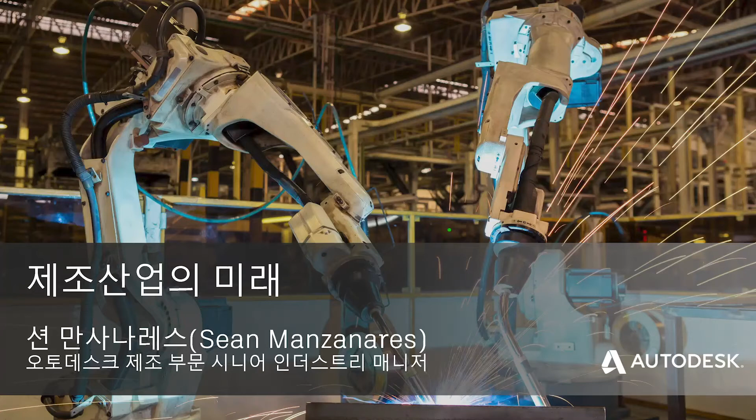I'm a senior manager of the Business Strategy and Marketing Group, working on market development for North America and Asia Pacific. Autodesk makes software for people who make things. If you've ever driven a high-performance car, admired a towering skyscraper, used a smartphone, or watched a great film, chances are you've experienced what millions of Autodesk customers are doing with our software.

In June of this year, President Moon Jae-in declared a manufacturing renaissance vision to turn the country into one of the world's top 4 manufacturing powerhouses by 2030. This will accelerate manufacturing innovations with a focus on making things smart, such as smart factories, and increasing the adoption of advanced technologies, including artificial intelligence based in manufacturing, also eco-friendliness, and a convergence. This vision prioritizes nurturing talent and technology adoption.

Korea is aligned with Autodesk, and this is what we call the future of making.

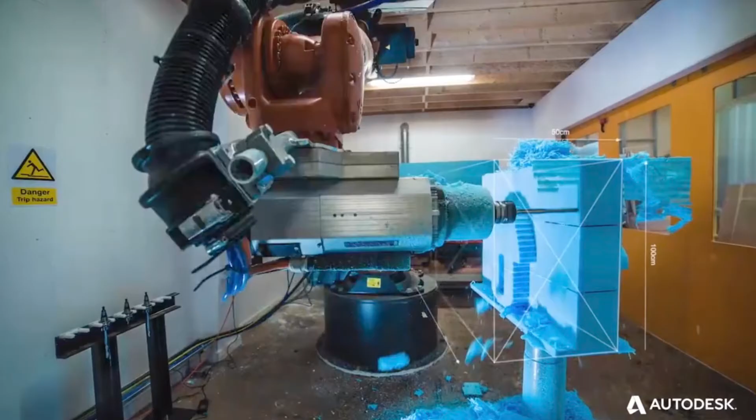For those that don't, let's watch a quick video that showcases where we are at with Autodesk and our products.

Every time I watch that video, I smile and I capture something new. And this video really showcases who Autodesk is. When you look at us in terms of media and entertainment, commercials, gaming, movies. If you look at our architectural engineering construction business, you can see the tallest skyscrapers and the software that we use to design that. I'm here representing our design and manufacturing group today.

A lot of our technology is on display in that show reel as well.

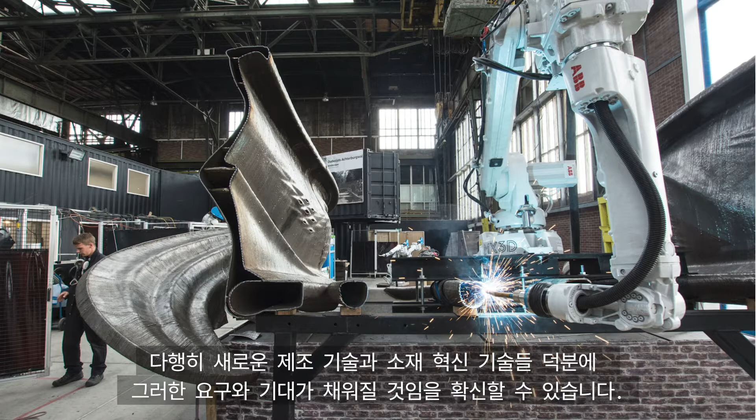One thing is for certain, our customers are in control and manufacturers have a problem. Our customers expect, actually they demand, more innovative and better products. The good news is that new manufacturing technologies and material innovations offer tremendous promise to do just this. But there is a problem. Even if manufacturers are able to spend more on manufacturing, the skilled workers needed to run these new machines are missing. 40% of manufacturers say that with an aging workforce, skilled workers are virtually impossible to find.

So companies are asked to do more with less. The problem is that recent trends in manufacturing aren't looking good. Over the past 10 years, overall productivity of global manufacturers has increased just 3%. That's a 0.3% increase per year in productivity. This is a major problem for manufacturers. 61% of CEOs polled say that their biggest barrier to delivering more innovative products to their customers is engineering productivity.

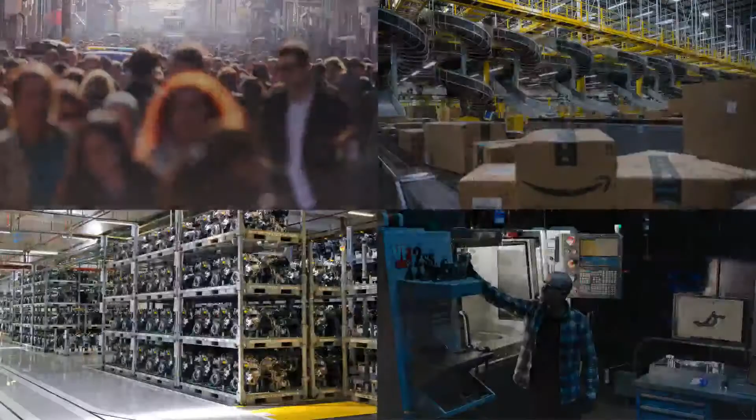So we cannot continue as we do today. We need to do more with less negative impact on the planet. Addressing the inevitability of having to do more, along with the reality of doing it with less negative impact, is a massive challenge. But addressing this fundamental capacity issue is also the biggest design and manufacturing opportunity we have ever had. It is up to us to turn a challenge into an opportunity of better.

Despite the trends, CEOs generally see this as an opportunity for their companies. 95% of CEOs see technology changes as an opportunity for them to thrive. Just want to repeat that. 95% of CEOs see technology changes as an opportunity for them to thrive.

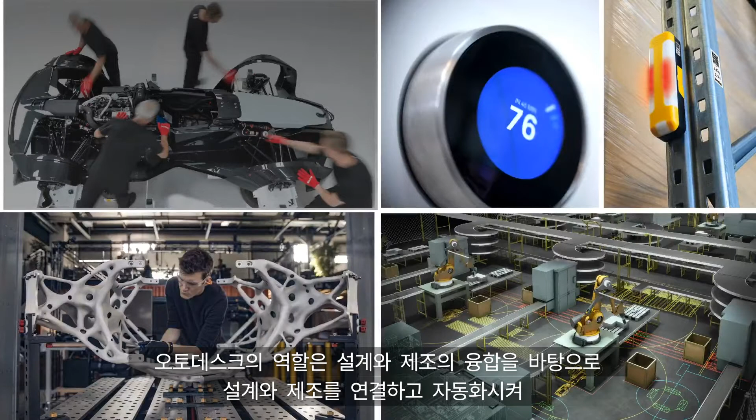Our answer is to help companies innovate and increase productivity by connecting and automating design and manufacturing with the convergence of design and manufacturing.

Recently, I was reading an article from Forbes where Bernard Marr wrote about the 9 mega technology trends and how they are reshaping our world today.

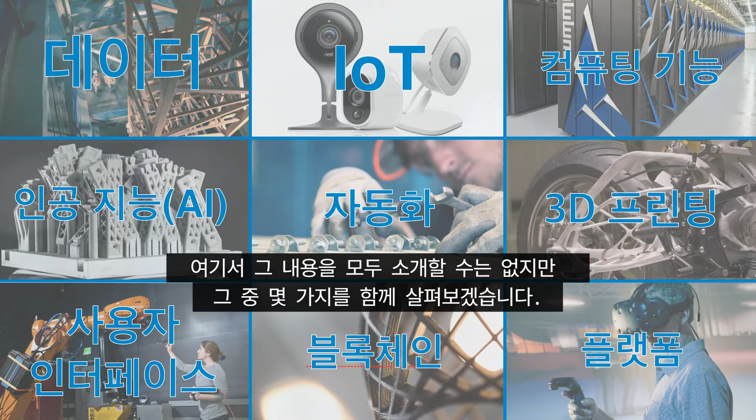Now, I'm not going to hit on all of these, but there are a few of them that if a company were to embrace, can help them with their competitive advantage. Because all of these together are disruptions, and they're disruptions for your company, they're disruptions to your return on investment, they're disruptions to your bottom line.

So out of these 9, let's start with computing power. What you see is a supercomputer at Oak Ridge National Laboratories called the Titan. This is a government facility in the United States, and not everybody has access to something like this.

Supercomputing is just that, it's super. But how do you, as a small or medium or an enterprise company, accept and be able to become competitive for people that do have supercomputing power?

High performance computing enables you to increase the speed of research and reduce time to results by running high performance computing in the cloud and scaling to a large number of parallel tests than would be practical in most on-premise environments. What this is saying is that something similar like Amazon's cloud is bringing HPC for the 99% of the people.

So if you do not have the capability, the capacity, or access to a supercomputer like the Titan at Oak Ridge National Laboratories, you are able to leverage the same supercomputing power in the cloud. And that's a key word that we're going to talk about, is the cloud.

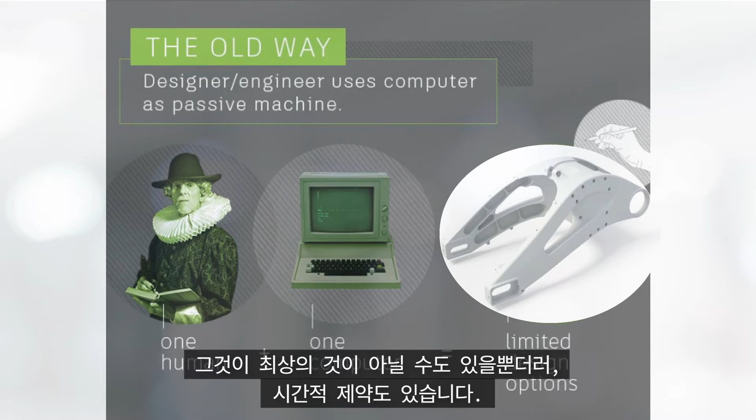For example, the old way of doing design is when you have a human and you have a computer, and you input your team's ideas into the computer for product X. However, you're only getting limited design options. And those design options may not be the best design option, but you are bound by time. You are bound by different impacts to coming up with the best design.

So your concepts may be limited, but they're based on, is it the material or the manufacturability? Do you have enough time to do validation? Bottom line, it literally is your time to market. How are you able to go from concepts to production faster than your competitors?

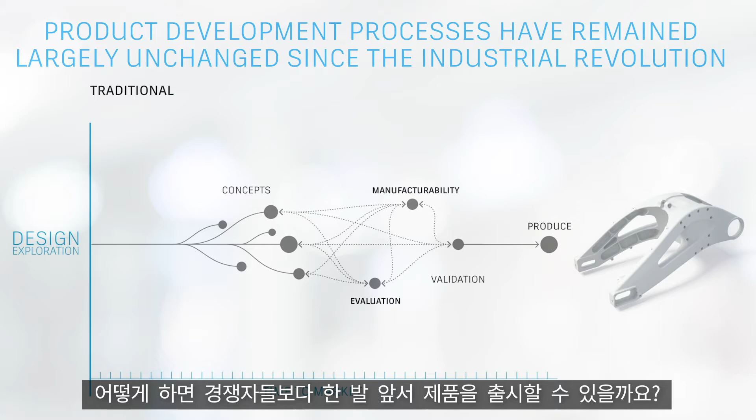Let's talk about the new way of doing design. The one human or the human team is still consistent. But now you are incorporating machine learning algorithms or artificial intelligence with unlimited cloud computing power, which are going to allow you to yield hundreds, if not thousands, of different design options.

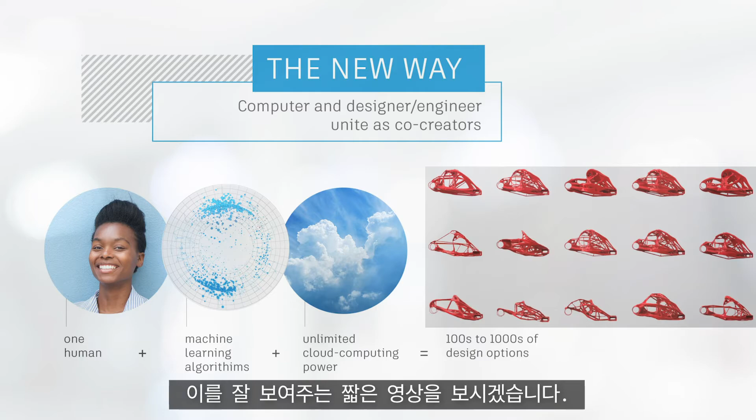Let's watch a quick video that describes this for us.

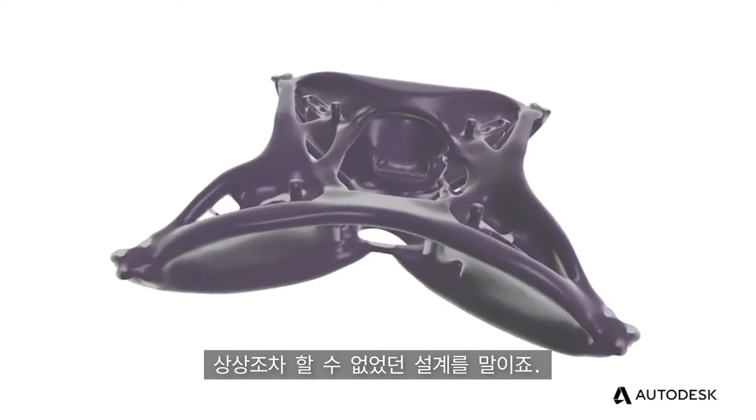What if you could come up with thousands of options for a single design without drawing, all of which meet specific goals set by the designer? And from those options, pick the one design that delivers on the most important criteria, the design you couldn't possibly have imagined. This is generative design, a technology that harnesses massive computing power, creating forms with precise amounts of material only where needed, achieving maximum performance while wasting nothing.

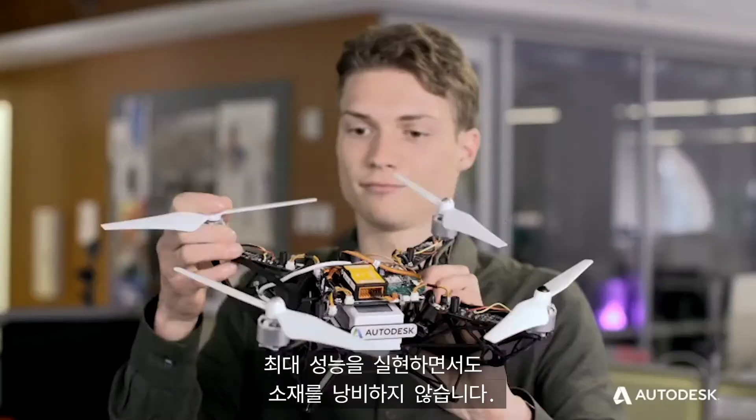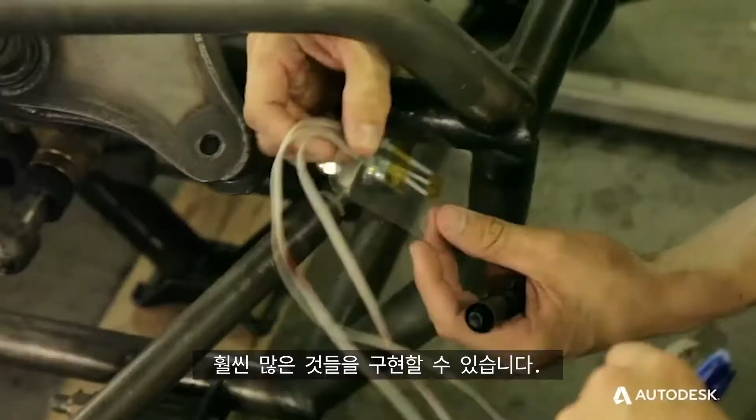But generative design can be about much more than simply turning out alternatives. Prototypes can be scanned and equipped with sensors that provide real-time performance data that can be looped back into the design process, so the object, in effect, co-designs itself. And depending on the material and method of manufacture chosen, the software can optimize the design for those choices.

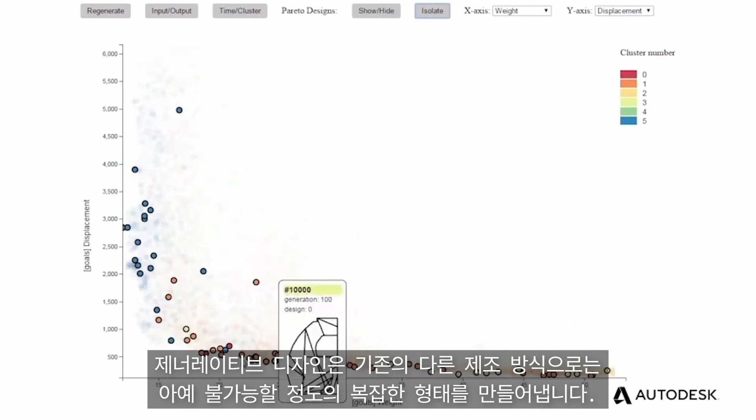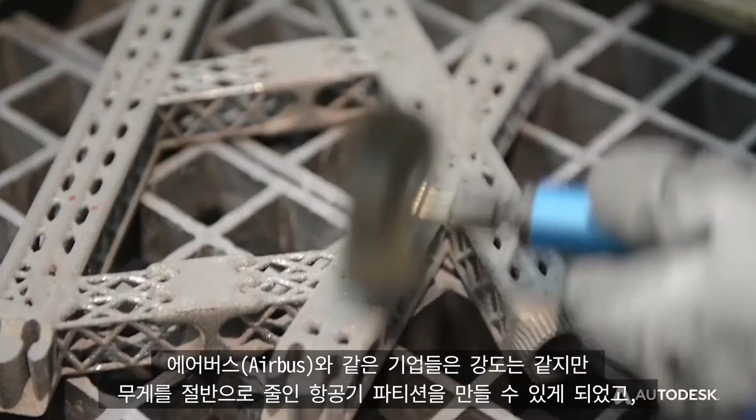In its search for the optimal design, generative design creates complex forms that would otherwise be impossible to make using traditional manufacturing methods. Now, with advancements in material science and the ability of 3D printers to print metal, companies like Airbus can create forms like this airplane partition panel that's half as heavy and just as strong. The result? Significant reduction in fuel costs and CO2 emissions.

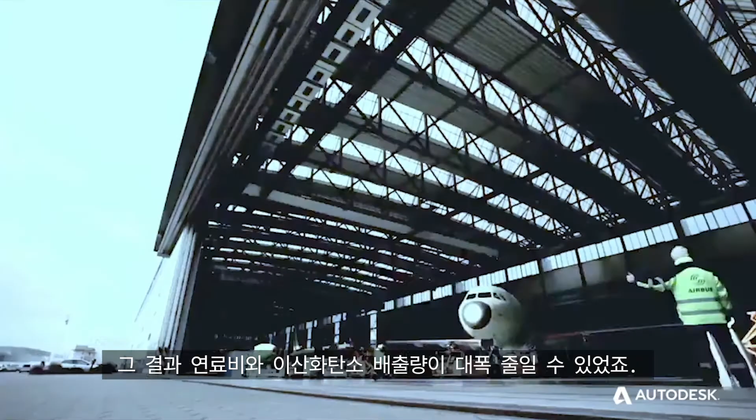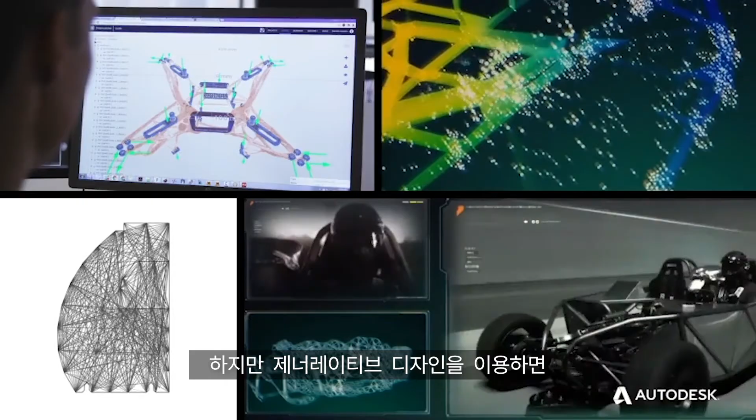The things that have limited us in the past, software, materials, manufacturing, no longer do so. With generative design, the world can look and perform any way we want it to. This is the next stage in the evolution of design, and it's happening now.

I thought a big takeaway from the video was the quote: achieving maximum performance while wasting nothing. This begs the question, are you taking advantage of these tools that are commercially available today? An additional question also has to be asked: what is your competition doing in this space?

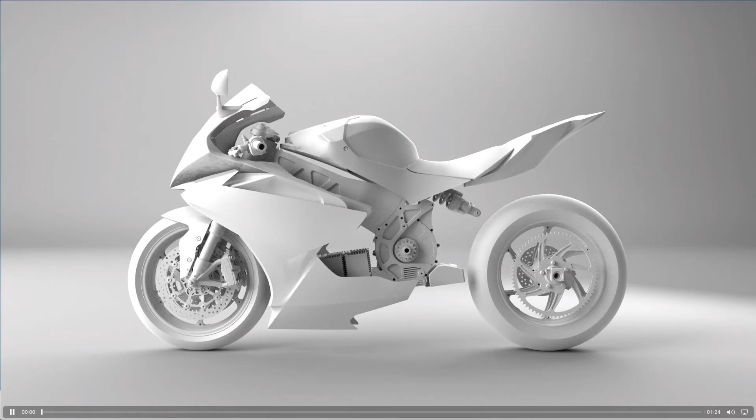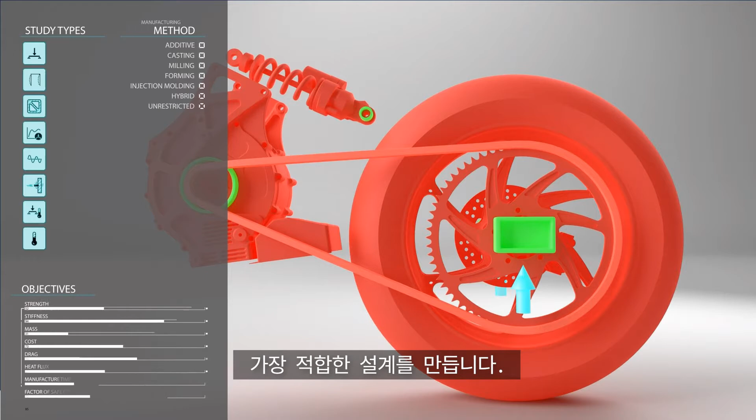Utilizing the motorcycle again, you select 2-3 different areas, areas that you need to preserve, obstacles you need to avoid, as well as the types and amount of loads that you want to put on your design. Now you're leveraging supercomputing power in the cloud, as well as artificial intelligence to help you make the best designs possible, allow you to select the best designs possible.

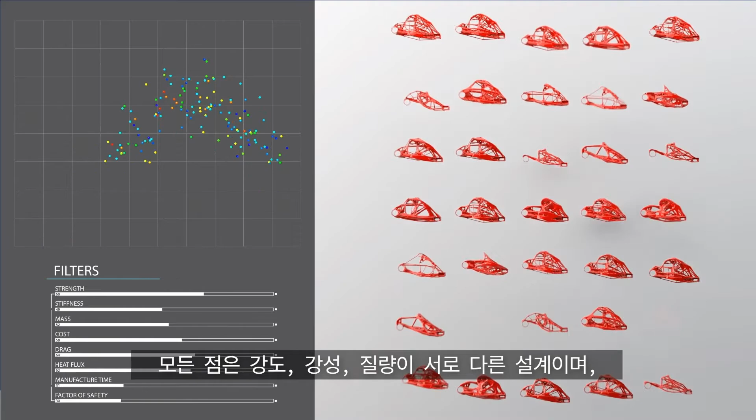Every dot is a different design based on strength, stiffness, or the mass. And now you can start playing what-if examples by putting the different designs in there that'll help you understand and make the best decisions possible that you would never have been able to do in the past.

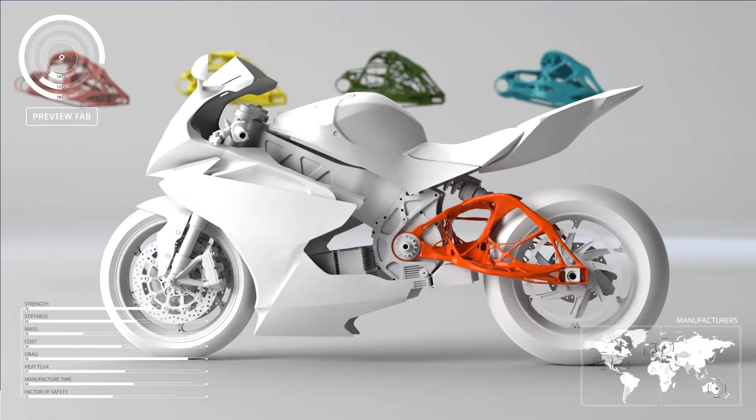Ultimately helping you select and differentiate yourself. And then it goes into how you want the part to be manufactured. Obviously, you're going to still be using some subtractive manufacturing methods. Being able to do this all within the same window is critically important.

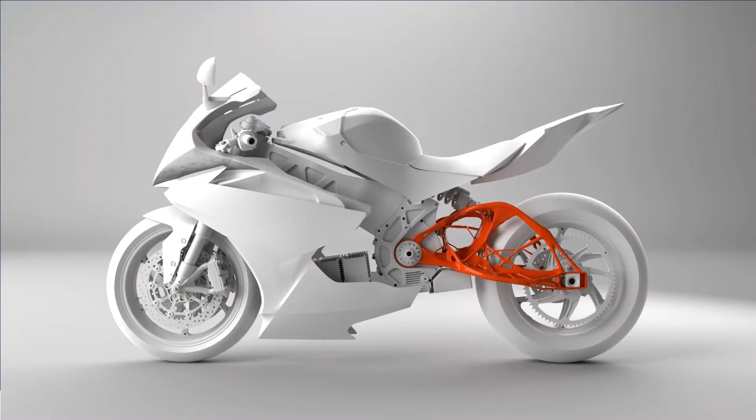Let's take a look at another trend, which is 3D printing, historically known as rapid prototyping and now known as additive manufacturing.

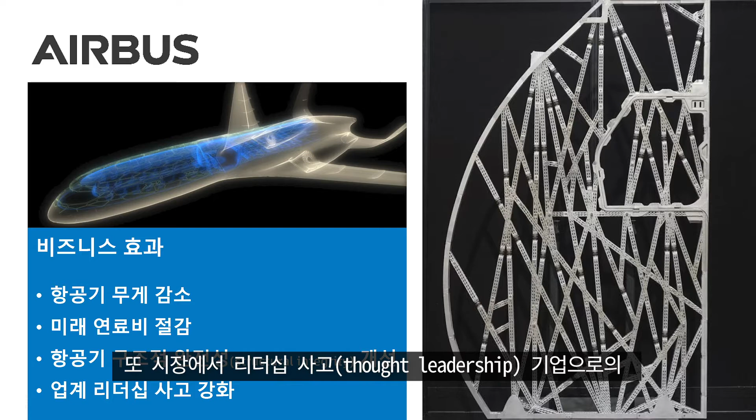You saw in the video about what is generative design, some examples from Airbus. This is the Airbus partition, but it was not just about coming up with a new design that looked organic or structurally superior. Airbus has to make business decisions. They wanted to reduce the weight of the aircraft at delivery. They wanted to save on future fuel costs. They also needed to signal the market that their thought leader position is number one.

So we take a look at the partition. This is what it looked like after 3D printing or additive manufacturing. This is the nested product. What's also interesting to note is that they invented a new alloy called Scalmalloy.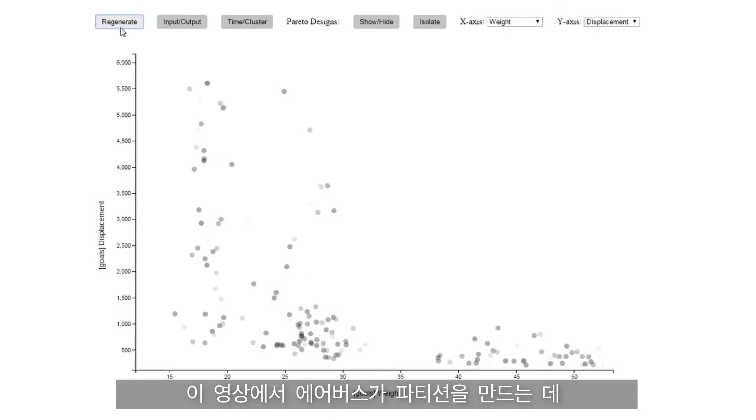Let's take a look at the video of how Airbus utilized generative design for their partition.

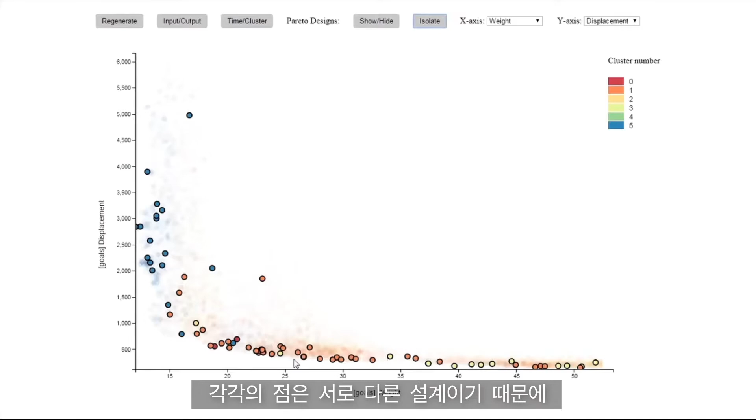Every dot is a different design based on stress, based on force, and these always change based on the needs of the design, not on the needs of what a designer wanted to do. They started to get a better look of these thousands and thousands of different designs to help them make the best decision. Once again, every dot is a different design, which helped them make the best decision for their product. Now, did they want to make it stiffer, heavier, lighter, stronger? All of these different choices help them come up with the best design.

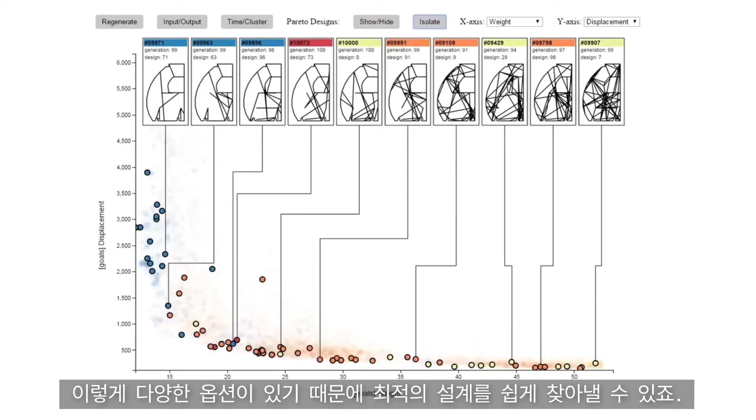Let's look at another company. General Motors plans to launch 20 new all-electric vehicles by 2023. General Motors believes in an all-electric future. So what are they going to do to help them? They looked at one of their products, which is the seatbelt harness. They also had business impacts they needed to make. They needed to save on material costs. And they needed to simplify their supply chain and increase performance.

Let's take a look at what General Motors is doing.

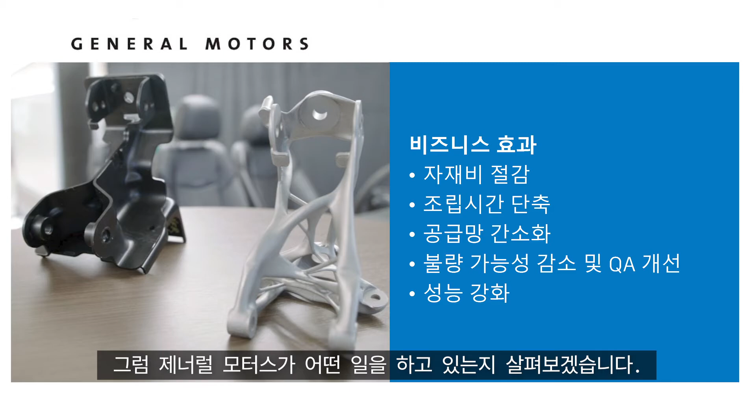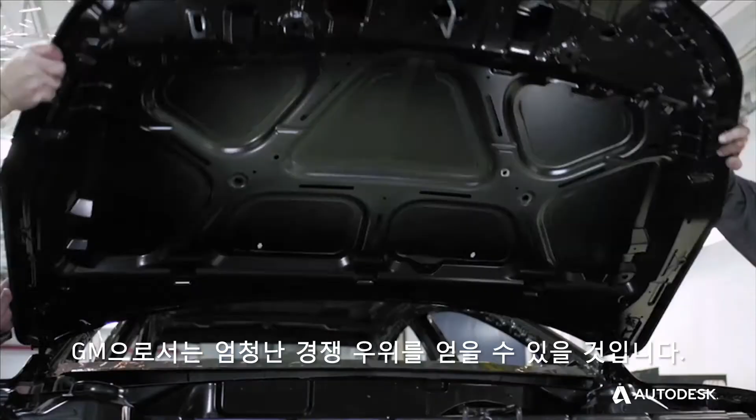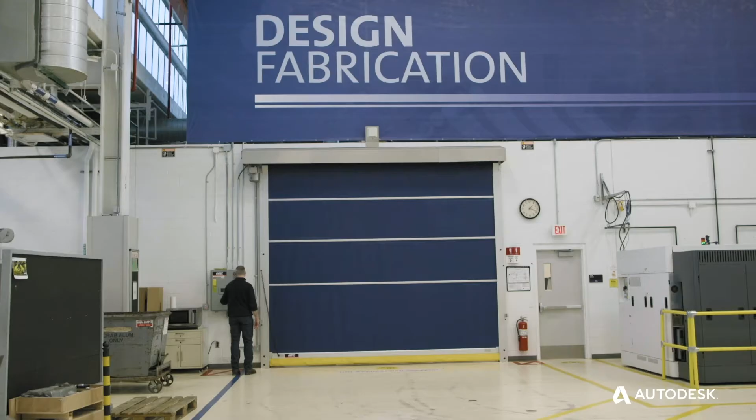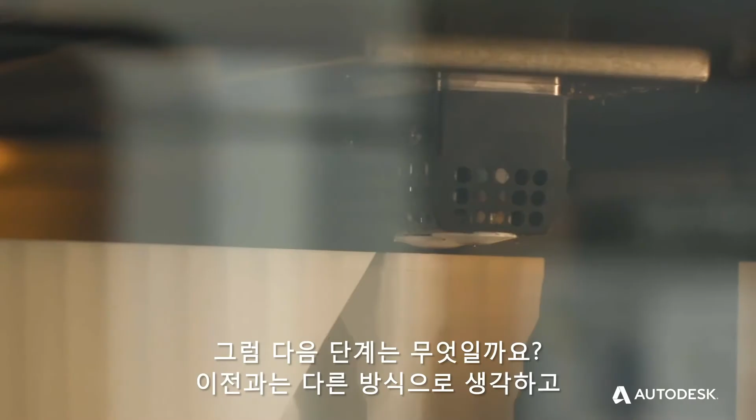At General Motors, we're all about putting our customers first and at the center of everything we do. If we can add a mile per gallon of fuel economy, if we can extend our range 10 miles in an electric vehicle, that can be a huge competitive advantage for General Motors. As you start looking into the future, generative design paired with additive manufacturing can be completely disruptive to our industry to deliver those functionally optimized designs and deliver performance to our customers that they couldn't get any other way. We've been doing additive manufacturing at GM for over 30 years. Rapid prototyping, assembly, tooling, jigs, fixtures. How do we take that next step? Getting people to think differently, not migrate back to, well, we can't do it.

Additive manufacturing can enable us to do this. We have some very unique design challenges in some of our upcoming vehicle programs.

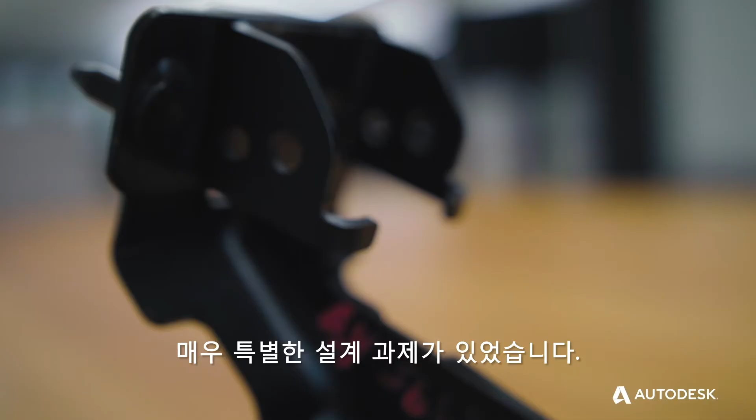One of those was the seat bracket. That seat bracket is very important from a functional safety perspective. How can we fully functionally optimize that design for mass?

We chose to use generative design as our design tool to come up with different options for the seat bracket. Normally when we face a design challenge like that, we may come up with 2 or 3 different design options, but with generative design, we could come up with over 150 solutions that we just couldn't have thought of with any other existing design tools.

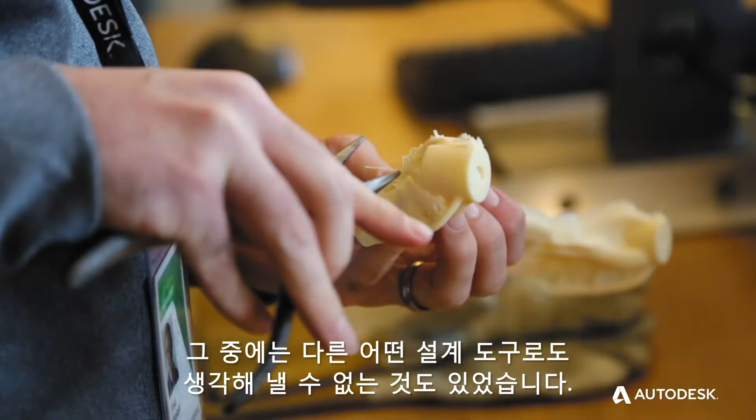We formed a partnership with Autodesk. We thought it was a unique opportunity to really use those tools to deliver a design that we couldn't come up with any other way.

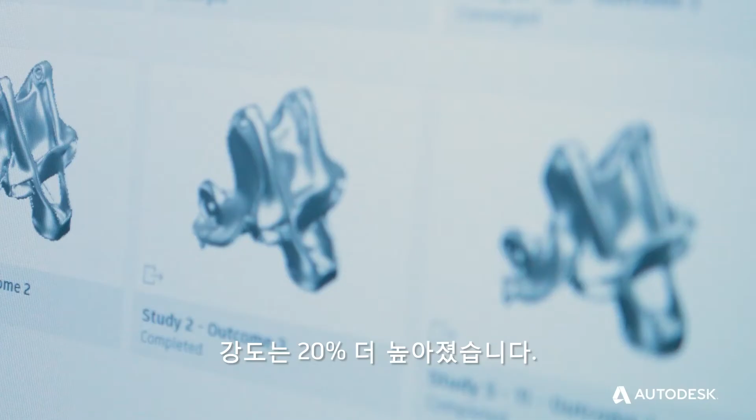We've run it through our normal set of test procedures that are required for this part. This part is so much better than the previous part. 40% mass savings, at the same time getting 20% stronger, far exceeded my expectations of what we could achieve.

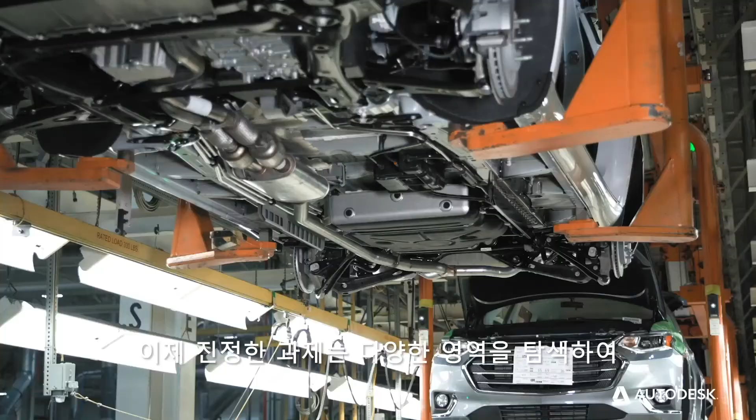We have many different parts and pieces on our vehicles, over 30,000 on average. So now the real challenge is to find all those different applications where we can apply the same principles of generative design to really optimize our vehicles further.

Let's look at our last example of the mega technology trends about interacting with technology.

We're going to move to Germany, where Claudius Peters was founded in 1906. Claudius Peters is serving the heavy-duty industries, and they are a leading manufacturer of material handling and processing systems that can be found in cement, gypsum, steel, and aluminum plants across the globe.

So as we were looking at Airbus and a partition and General Motors with a seat bracket, let's look at how generative design is helping industrial manufacturing.

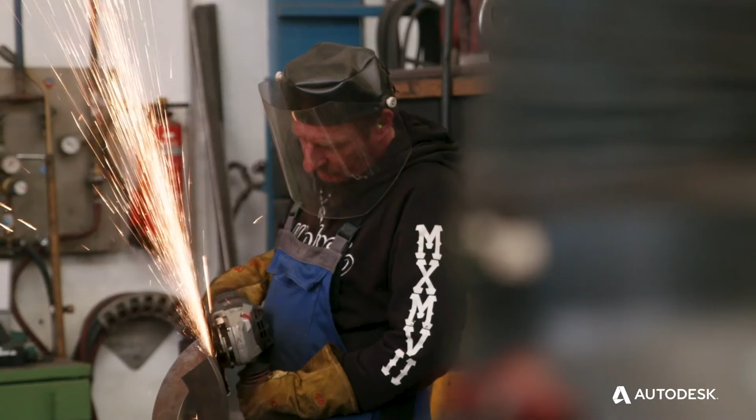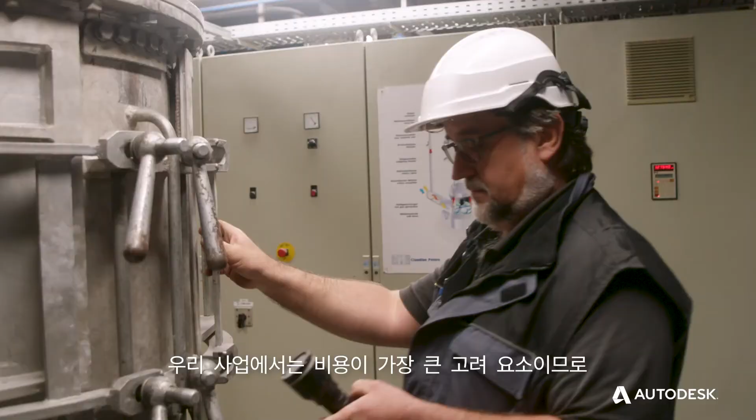Claudius Peters provides machines and process plants for 112 years. Our business is very cost-driven, so the customer is expecting us to deliver faster, to deliver cheaper. We have to change how we do things, how we engineer, how we make projects and products.

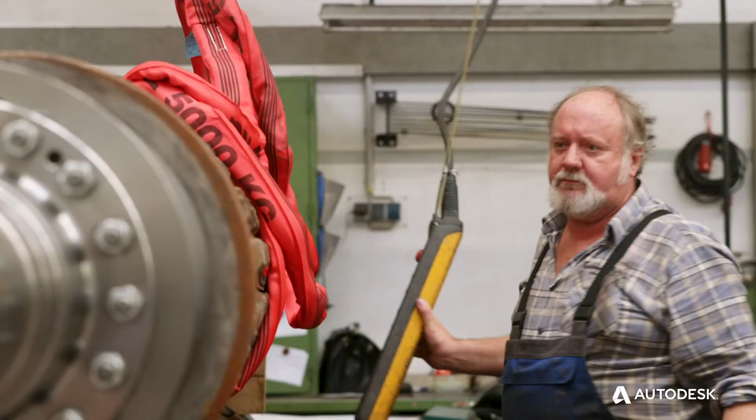Claudius Peters loves to experiment with new technologies and new ideas, so I came up here one day and gave them half a day of training on generative design.

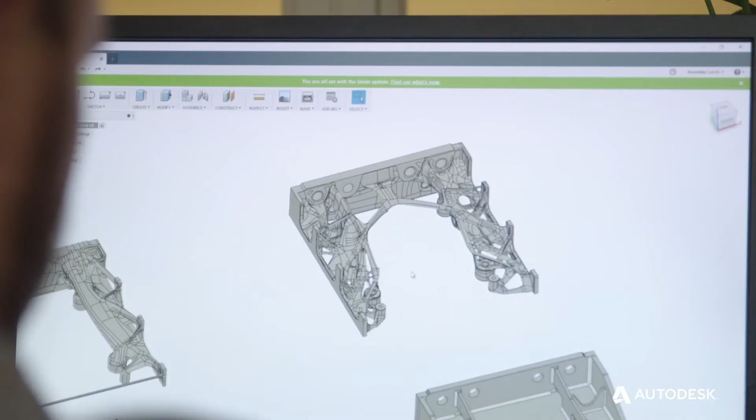At first I thought that the workshop was just for fun. We were designing and using some easy parts, but we ended up recreating a real part from Claudius Peters. We were completely surprised about the shape and what generative design made out of our already optimized part.

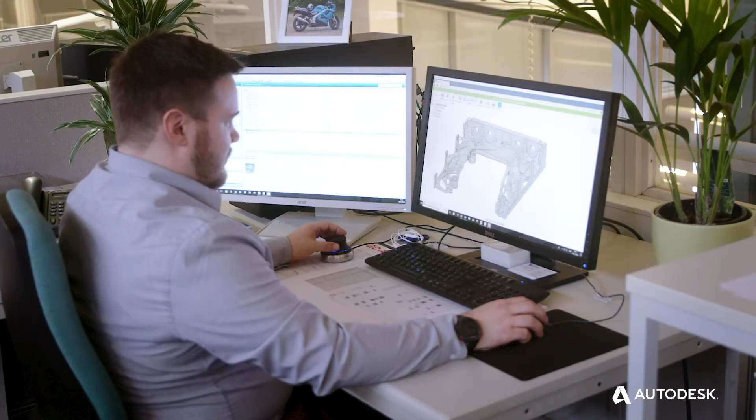The oldest engineer in the house actually did some calculations and said himself, wow, I didn't really think that was going to work, but this part is a lot better, even better than the optimized part I created yesterday.

And from that point, they began to iterate on that rather spacey looking design and think about how they might be able to manufacture that part using traditional techniques.

We took the proposal from generative design and we engineered it reversed so that we can do it with traditional manufacturing methods.

So when you use generative design, you have to rethink as a designer. Generative design requires that you model the constraints. You do not think of a part or how this part looks. You think what is the requirement, what are the loads, what are the constraints of a part. And then generative design gives you possible designs.

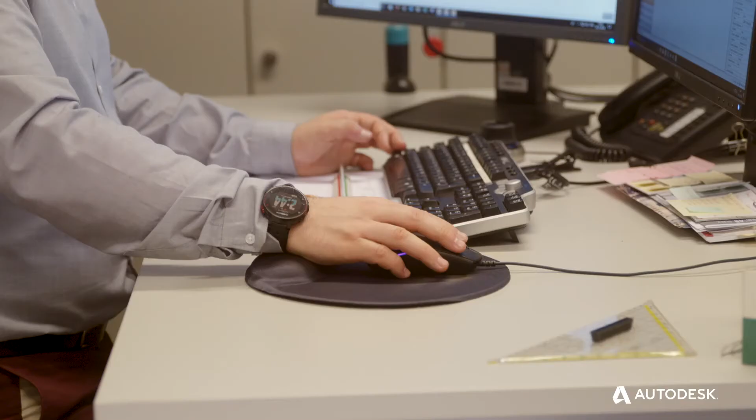Before Autodesk Generative Design, the optimization process took several weeks, even months. Now, with Autodesk Generative Design, it took us half a day. To work with Autodesk Generative Design is easy, fast, and the outcomes are great. I love it, plain and simple.

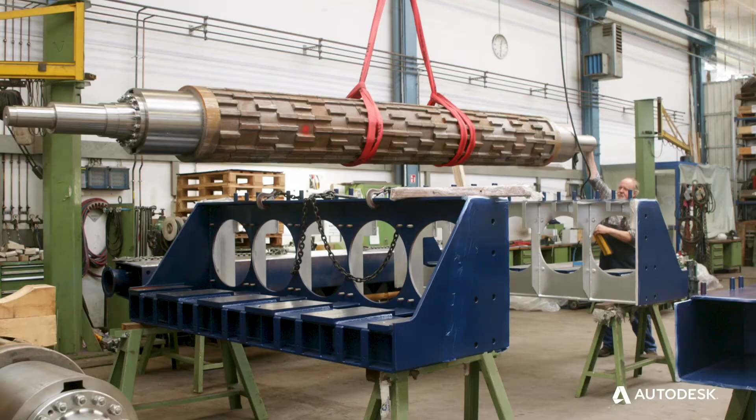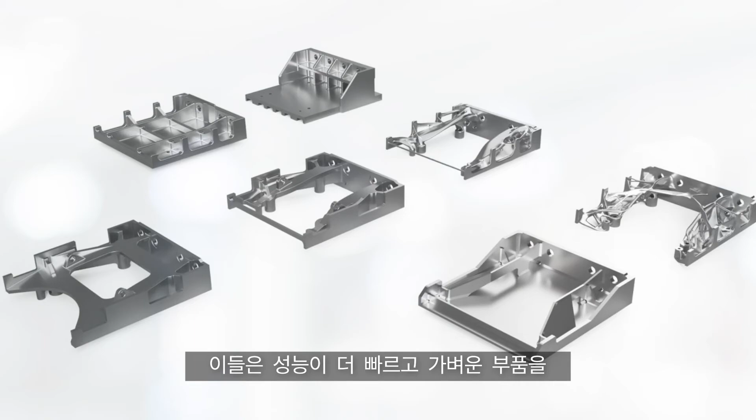It's amazing what you can see with a company that's 106 years old that is utilizing and leveraging new technology like the cloud and artificial intelligence to make their products better. You saw a lot of the different designs that they were coming up with and how they tested a lot of the new solutions, and they were able to make the part lighter and faster and obviously more cost efficient.

The unit on the left coming in at 168 kilograms versus the new design on the right at 52 kilograms. What's important to understand is they were utilizing generative design for the inspiration for a new design that they're still manufacturing the same way. They are reducing the weight by 256 pounds per unit. And when they look at an overall savings for the smaller assembly, they do 7 per year, it's a savings of 14.3 tons. And on the bigger unit, savings of 58.2 tons of metal that they are no longer utilizing.

Much more than that, they were able to change their manufacturing method and the outsourcing. These parts were coming cast from Cambodia, and now they're welded in their local factory, which prevents the stocking, handling and storage of the parts, and they weld as needed.

So in addition to General Motors, Airbus, Claudius Peters, and electric motorcycles, let's see how we're utilizing our own technology at one of our office spaces.

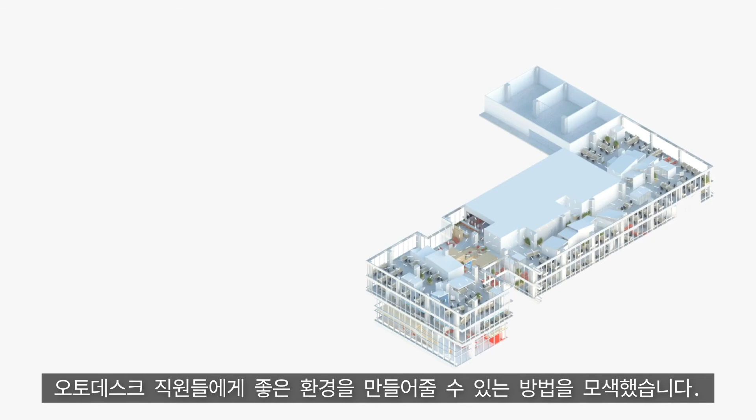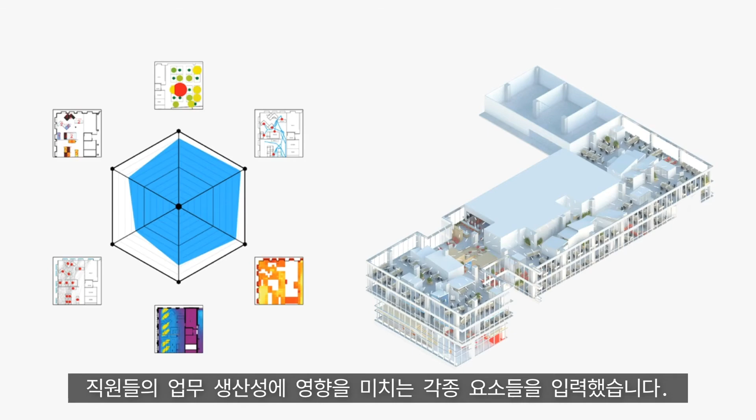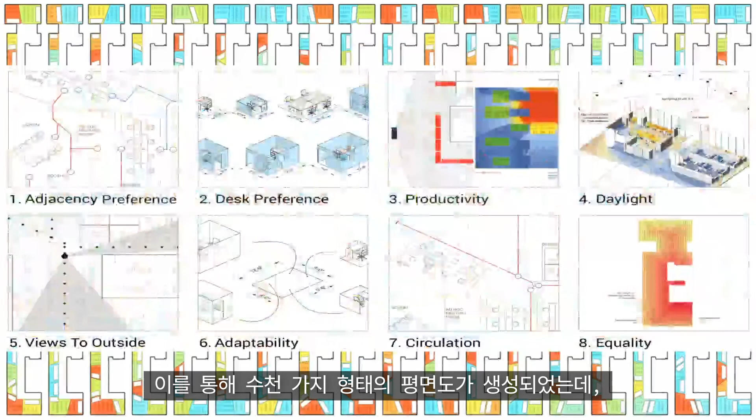We wanted to run an experiment to discover how we could maximize productivity and create a great environment for the people working at Autodesk. Utilizing generative design, we were able to input the forces that are influencing human productivity. We surveyed our employees and captured their preferences and work habits. Then it generated thousands of alternative floor plans, all in the time it would take us to draw just one. The system sought to minimize distractions, maximize outside views, and prioritize personal relationships.

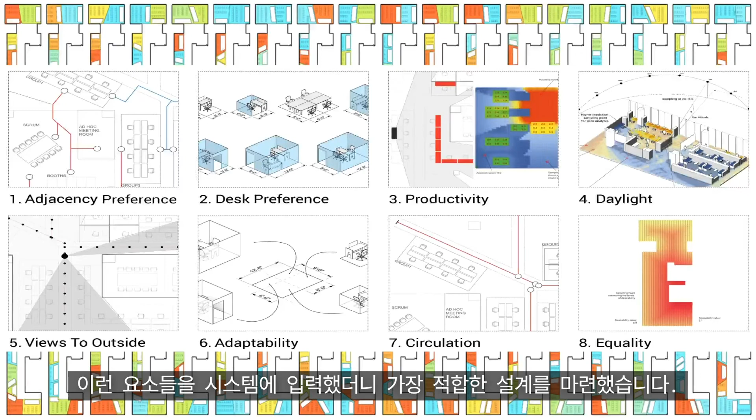Just as you saw the previous examples, when these were put into the system, we came up with the best possible design—literally dozens and dozens and hundreds of variations.

Let's take a listen to this video of the benefits of using generative design.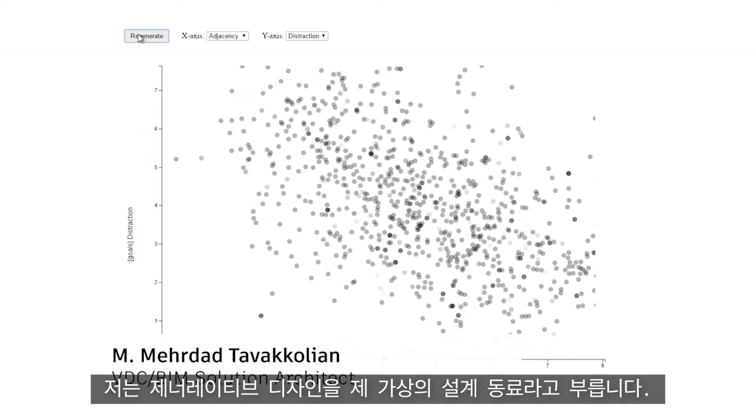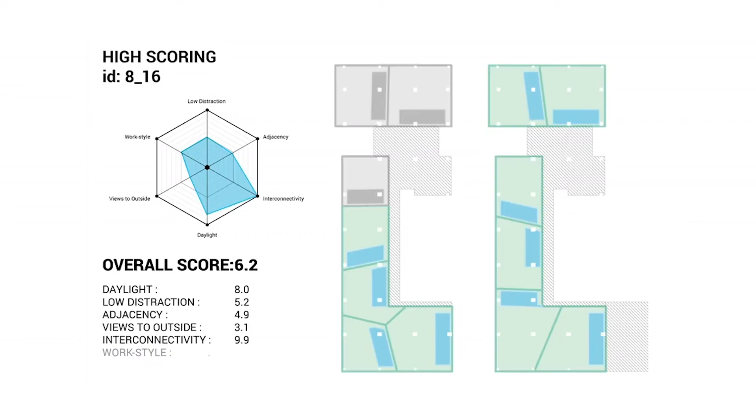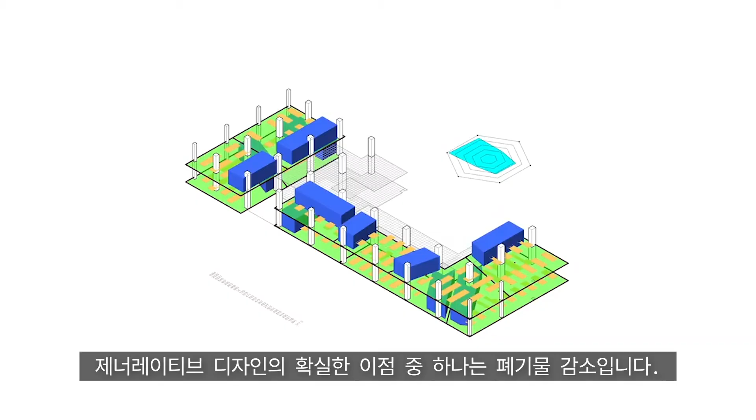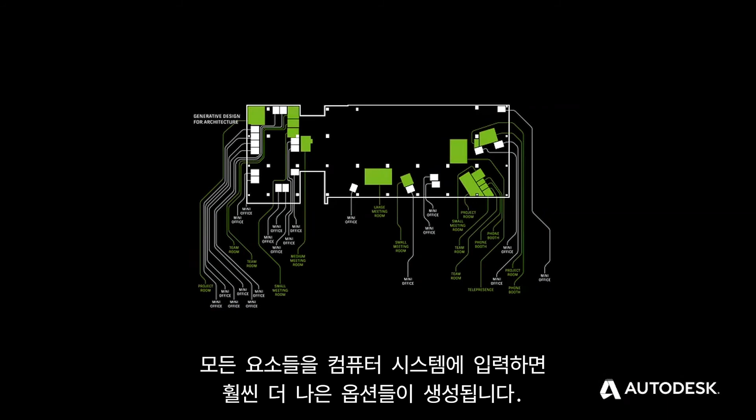Generative design is starting by specifying the high-level goals and constraints of a project, and then using the power of computation to automatically generate, evaluate, and evolve hundreds or thousands or even hundreds of thousands of design options to explore a very wide design space of possibilities. I call generative design my virtual design associate. It takes care of all the process work and option analysis. We've been using it to design many different iterations and try new things. It's given us the ability to test things very, very quickly. A lot of people think of computers and automation and instantly think, does that mean you can do everything in a fraction of the time? But for us, it's not so much about reducing the timelines where something that takes 100 hours suddenly reduces to 50. It's the fact that what you can do within those 100 hours is so much more. There are definitely benefits to generative design, such as reduction in waste. As a designer, you'd be more connected to the manufacturing, and having that close connection from the designer's point of view to the manufacturing is an added value. It could be the zoning of the site, it could be the sustainability factors, and if you mix all those things and feed it to the computer system, it creates a better series of options that you can then pick and choose based on your taste and implement. We get to see things that we never conceived of, and by doing so, we get to go and try it, do it, and actually make better design. I think that's the best thing that everybody wants altogether. For us, it's continually asking what's the next step in taking this a little bit further, applying a little bit more extra effort, and getting a lot more out of it.

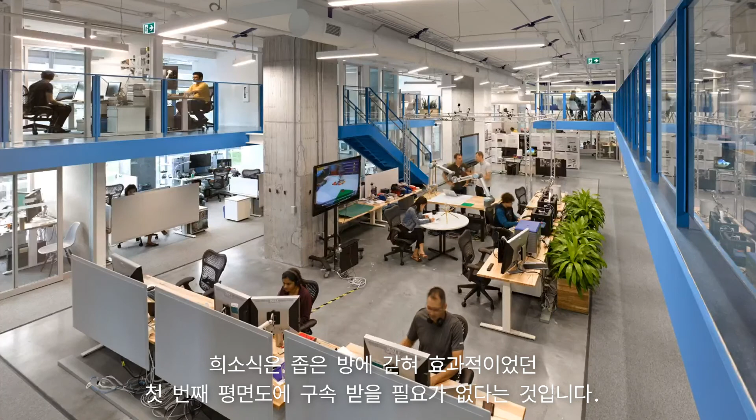The good news is we weren't just pushing cubicles around, and we were not just stuck with the first floor plan that worked.

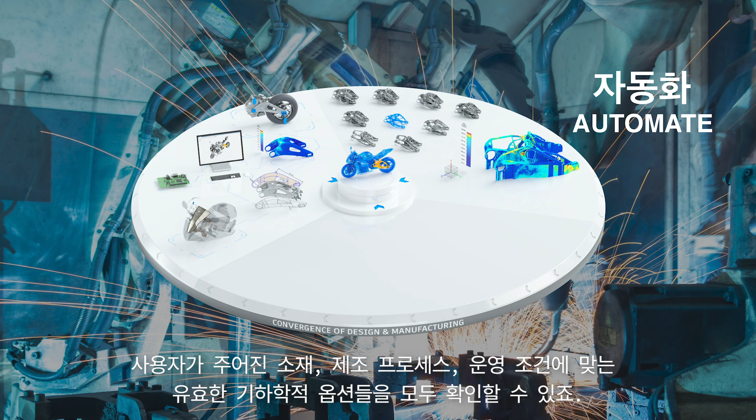This all starts with putting your data at the center. When you put data at the center of your processes and connect it to the right people at the right time, you break down the silos in the design process. Putting data at the center enables the connection of tools, processes, and people. Once the people and processes are connected, you can automate the processes themselves. Generative design, for example, automates the ideation process, giving the user the ability to easily explore all valid geometric options for a given set of materials, manufacturing processes, and operating conditions.

And because you ultimately need to get a physical product in the hands of your customers, we're making it possible to connect into your manufacturing facilities, even if that extends across the boundaries of your organization into your supply chain.

In review, we covered 5 of the 9 mega technology trends today. And as President Moon Jae-in declared in June, we hit on a few of those that are important to South Korea. Thank you for your time.